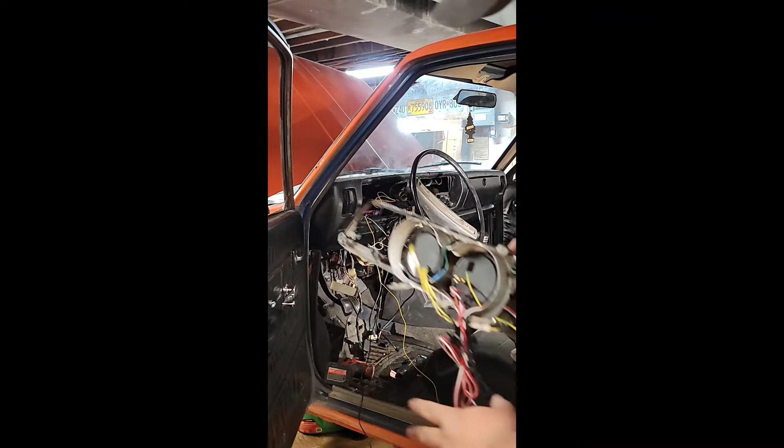Alright, now that we've gotten all of our wiring connected, the first thing we're going to connect is the speedometer, which I put on top of the dash. We're just going to hook that straight up here. Then all those wires that I ran into the dash earlier, I'm going to go ahead and plug them all in.

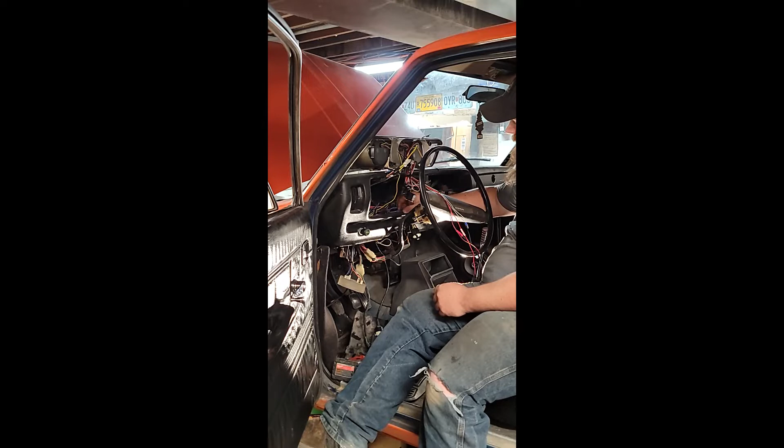Got a lot of extra wires that I found: power on all the time for my hot wire, ignition power, lights, and of course those turning signals. So the first thing we're going to hook up is our hot all the time.

A good thing to do is to switch up how you hook things up so they're not all the same. So I've got round connectors, I've got spades. Sometimes I'll put the spade on the gauge side, sometimes on the ignition side, or on the wiring harness side. Kind of depends.

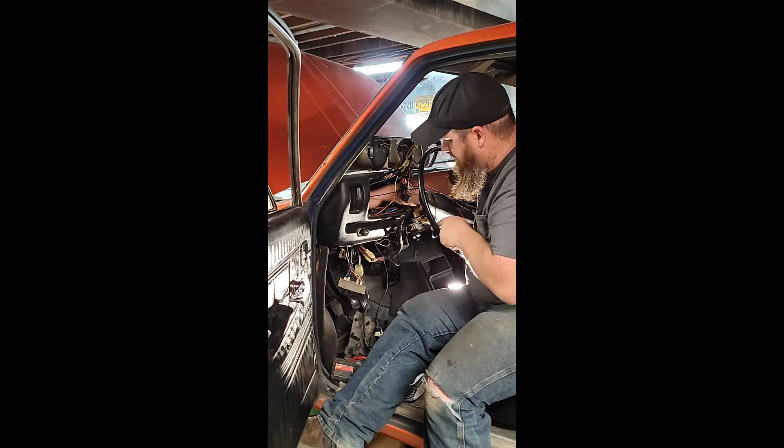Alright, so then I've got a ground, a feedback to where we're going to run ground. I'll get to ground underneath the dash.

Alright, here's where all the lights go, so we are going to plug in now.

Alright, I've got fused power, so since it's a fuse, I'm going to tuck it down lower so I can get to that 3 amp fuse if ever needed.

Ignition power goes right there. I'm going to tuck that 3 amp fuse back kind of where the ground is.

Now all I have left to hook up are the turning signals.

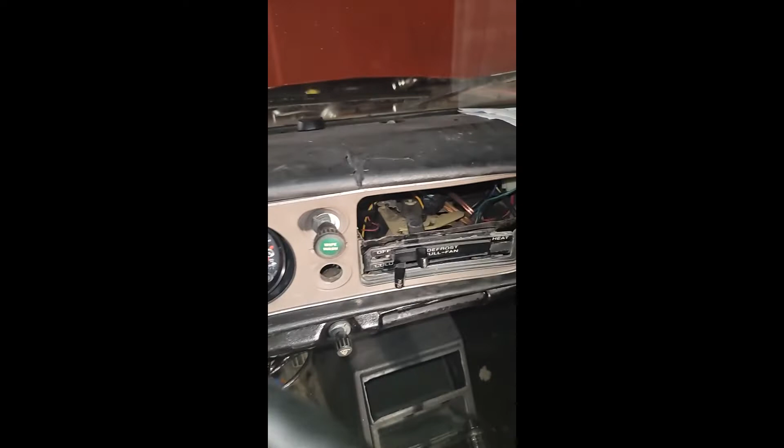Alright, getting this guy put back together, getting the dash back in, putting it back in, getting the windshield wiper put back together. And I want to bring up this thing, putting this guy back on.

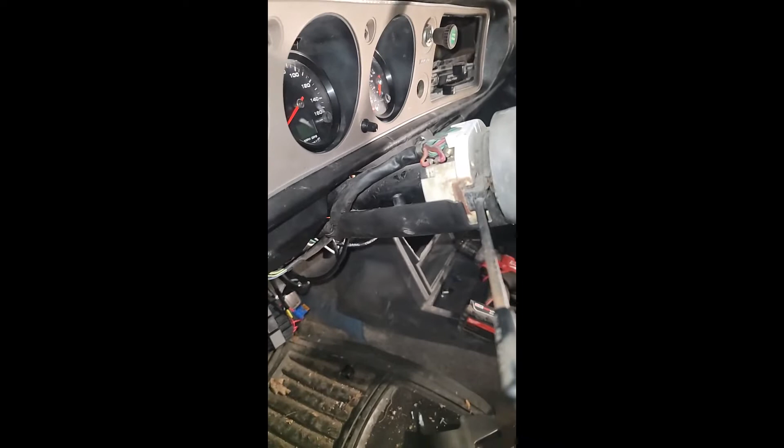One thing I recommend is putting the bottom on first. Once you get it back on, there's a screw here and a screw here. These two screws are the best ones to put in. I'll show you.

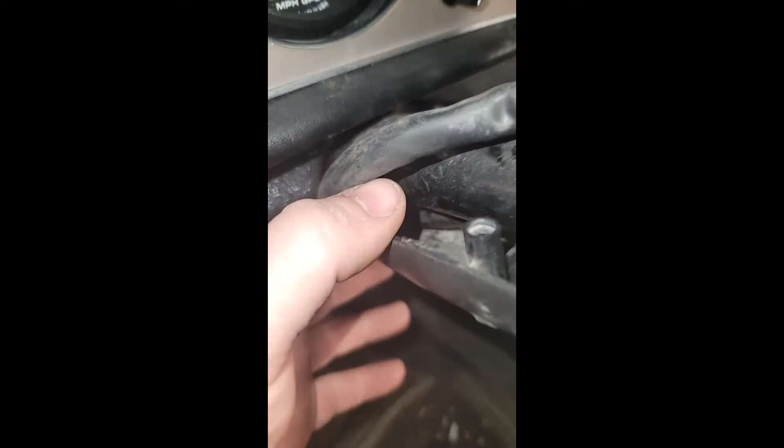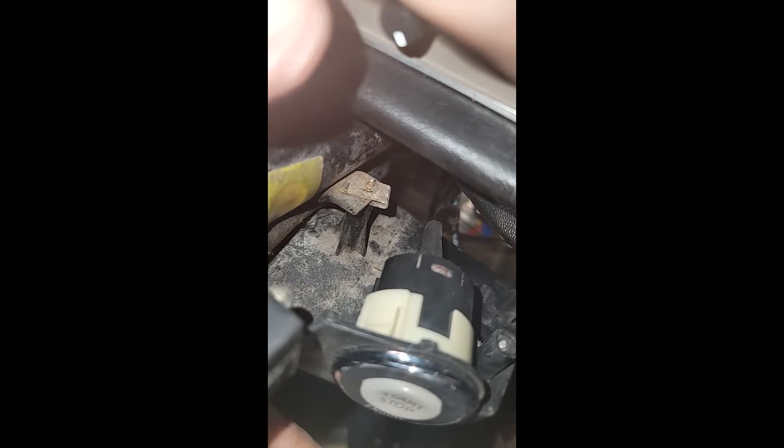Camera's set in a good spot, because they go—basically there's a little clip right in there it goes into, and then same thing on the other side. There's a clip there that it goes into, so that'll hold the bottom in and together.

Alright, now we're going to discuss programming the gauges now that they're installed and set. Everything in there is wired. So as it sits right now, there's no power going to anything. I made sure there's no power going to it.

The Speedhut gauges come set with 4 pulses per revolution, which is very common for V8s. In the style of wiring that we are doing, there's different styles: ECM, tach outputs, stuff for fuel injection and for coil packs for Mustangs, newer Mustangs, and stuff like that. LS motors have a single coil pack per injector or per spark plug, so they have different kinds of wiring for each kind of engine you have.

They're very thorough, so they did a very good job here, very descriptive. Now we have one coil that feeds a distributor, and we're pulling off the negative side of the coil, so we're going to have to do 2 pulses per revolution, which is common for a 4-cylinder.

Now all these gauges have these little buttons here, and this is how you program them. So what we're going to do is push and hold this button while we power up the gauges. So it's kind of bright here, but we're set to 2 now.

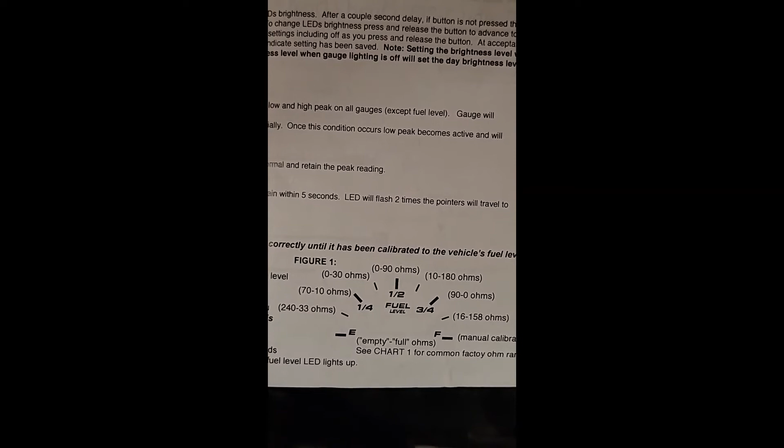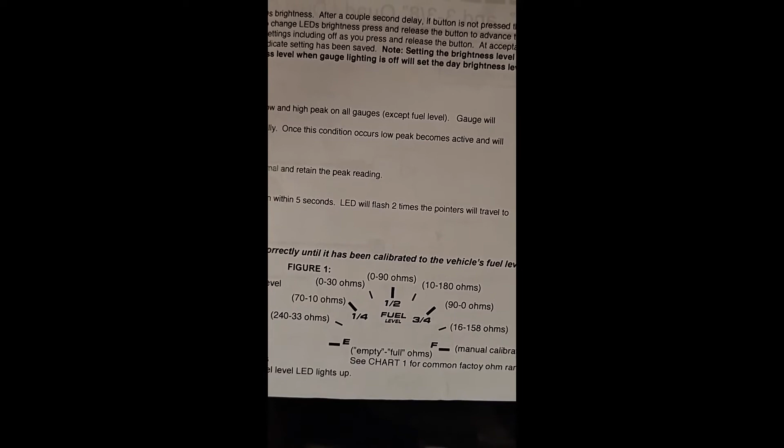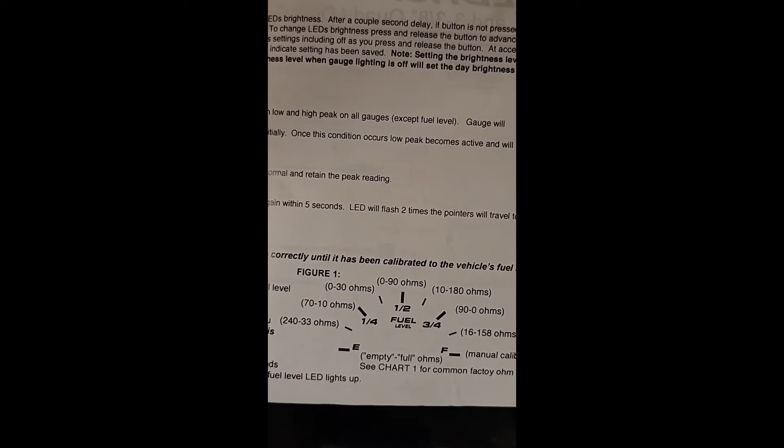Last thing we need to do is program the fuel gauge to the fuel sending unit. I'm not going to do the manual deal, I'm going to try to get the closest reading I can on ohms. Basically I have a couple different choices. On this car, 88 is empty and 10 is full. So I've got a choice of where the quarter-full sign is, either 70 to 10, which means I read 100% when full, or I can read low early.

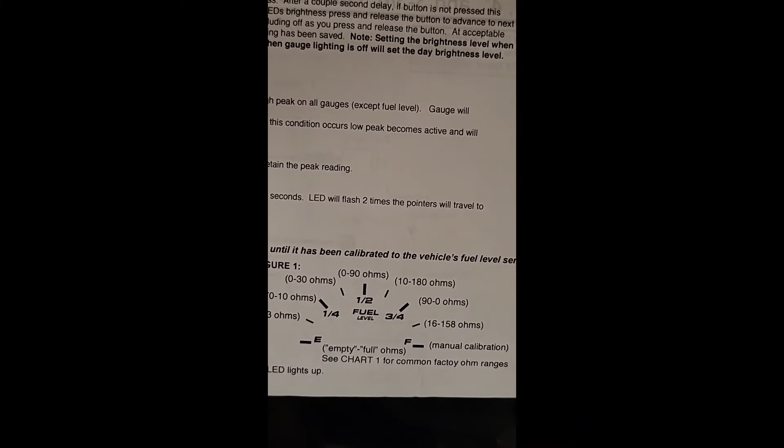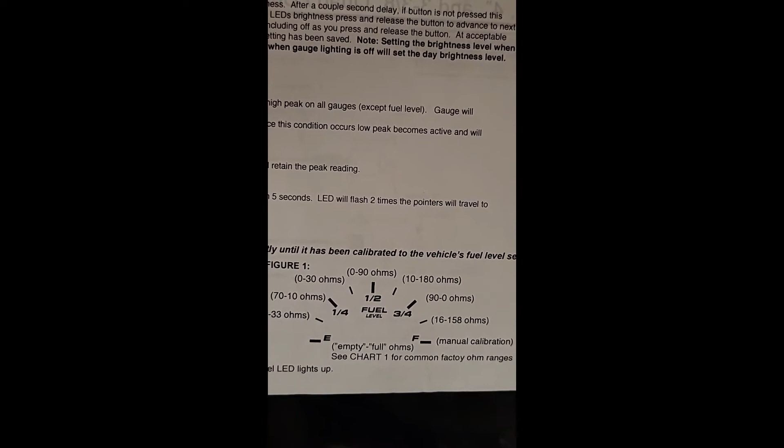It'll read empty, but won't be completely empty — that's a safer bet. Or I can go with 3/4, which will never show full, which is 90 to 0 ohms — it will never show full, but will get really, really close to empty. I'm personally going to try the 90 to 0, the 3/4 spectrum. I may try the quarter later, but for right now I'm going to do the 3/4.

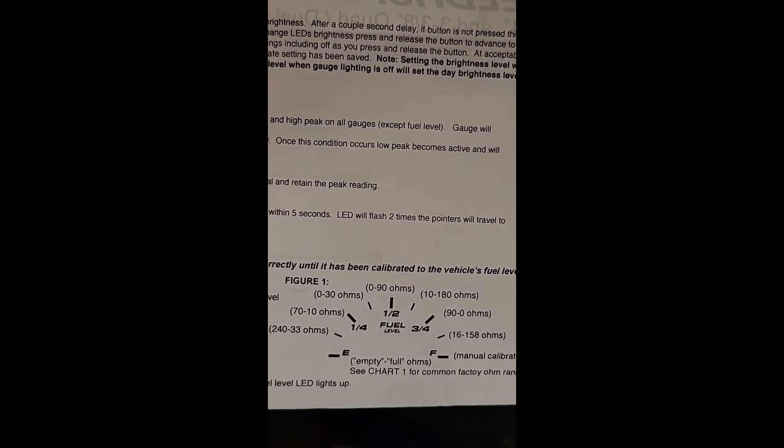Pretty simple, they've thought of everything. They've tried to get everything as close to manufacturer specs as possible for the most popular vehicles they're putting these in. So basically we just hold this for 12 seconds.

All right, so we can do that. I can go to the quarter if I want to stay safe and show empty early. I never run out of gas, but if I want to show empty accurately, I'm going to have to go right here.

And then, so we make sure that's good, to be done I believe I just hold this for 2 seconds. And the 2 blinks means that it's been programmed.

So now we're going to start reading what my gas gauge is. All right, it looks like I have a lot more fuel in here than I thought. Either that or I've got the gauge backwards. So only time will tell as I drive this thing and see if it starts moving up or down as I drive it.

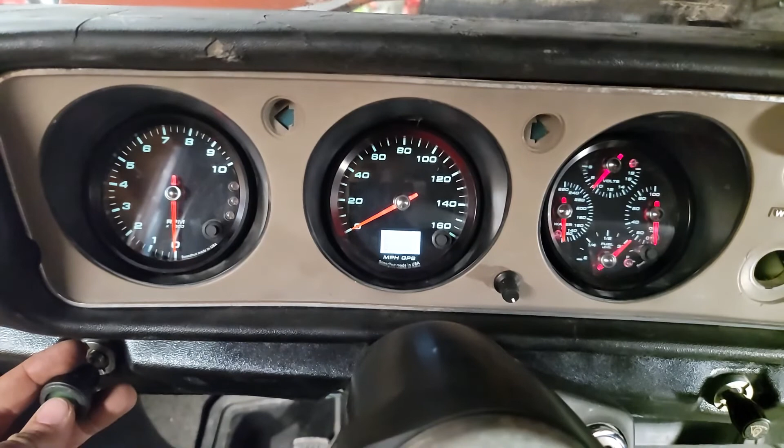And there you have them, gauges installed, looking pretty good. We'll go ahead and show you what they look like lit up. Everything looks really good, I'm really super happy about it. I can't wait to get it on the road and actually see how these things operate, see if they're as accurate, and make sure they are good quality. But they seem to be very nice quality, and I'm very happy with it so far.